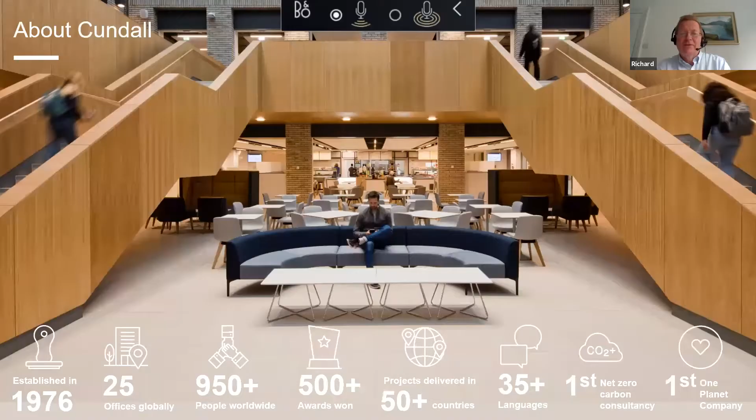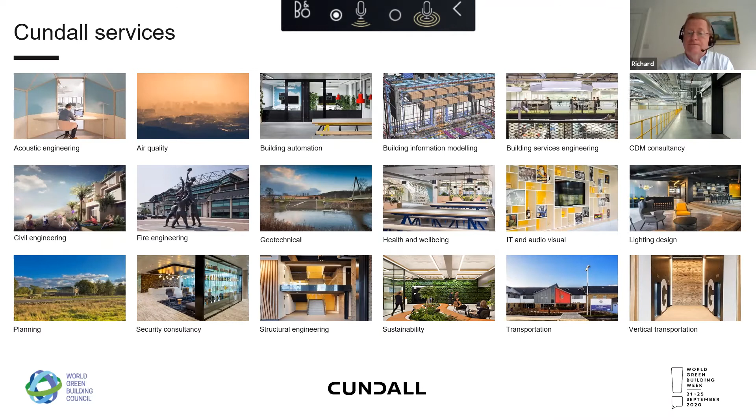We've got a very wide range of engineering services, so our core disciplines are building services, structures and civil. We've got a whole range of specialities around that to support those activities, between acoustics, fire, security. Sustainability is something that we drive through all aspects of the business, but we're quite specialised in that as well. And we work in all sectors: aviation, critical systems. Critical systems is a very key element for us, and it's very much an international offering, working for groups like Facebook, Microsoft, right around the world. Education is a particular strength of myself, and we do all the other main elements: retail, residential, etc. So straight into the presentation.

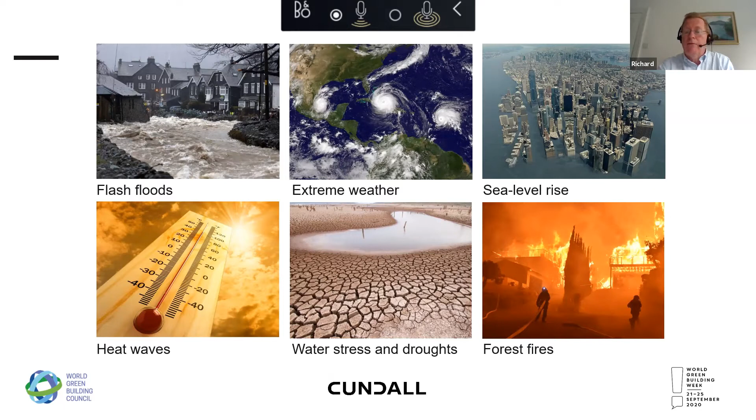The focus very much is about net zero carbon, and I've heard more about net zero carbon in the last 12 months than in the last 20 years. It's become a major consideration in many countries around the world, with countries recognizing there is a climate emergency. We've had extreme weather events in the last 5 to 10 years, between flash flooding and extreme temperatures. The contrast to flash flooding is water stress, so we've had droughts, and in the last 6 months we've seen wildfires in the US and Australia, with climate change recognized as one of the contributors.

We've also seen demonstrations right around the world, and these have been responded to by many organizations with a need to do something different. We have clients who have seen people demonstrating in their streets, and they've realized they haven't been doing enough. They've quickly been getting organized to put policies in place to start dealing with these issues. So there's a groundswell of concern among young people in particular.

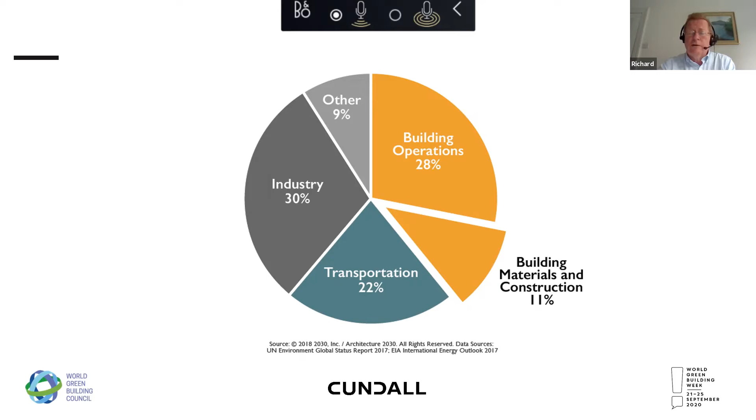When you look at where the source of carbon emissions comes from, the building stock is a major contributor. The actual operation of buildings contributes about 28% to carbon emissions. Building materials and construction is around 11%, so that's 39% of the total, which is quite substantial. Transportation, getting to and from buildings and homes, is a major contributor as well. So all these aspects have to be dissected and addressed.

In the UK particularly, we're seeing pressure from the top. The government has committed the UK to being zero carbon by 2050, and that commitment was made a year ago. It's legally binding, and public bodies are all looking at plans for how they would actually get to zero carbon. I'm currently working on what's called Gen Zero for the Department of Education, developing plans for zero carbon school prototypes, with the intention that all schools going forward will be designed to a zero carbon standard. This is going right through the country, and it's not just the UK.

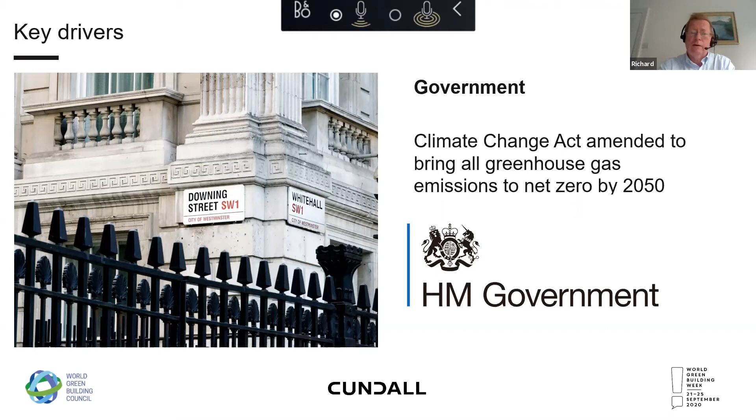There are many countries around the world now looking to adopt these as legally binding requirements. There's also quite a push from investors, who are looking for organizations that have taken a strong environmental stance to invest in. We work for various American funds looking at assets that are potentially able to be improved environmentally, but also provide social value, and they are buying assets right across Europe and the world.

Developers are committed to the World Green Building Council's net zero carbon commitments. We had a presentation last March with the Emirates Green Building Council specifically on this element. Right around the world, all the green building groups are taking up this challenge, and we would very much recommend that you support the Emirates Green Building Council in their efforts to achieve these commitments.

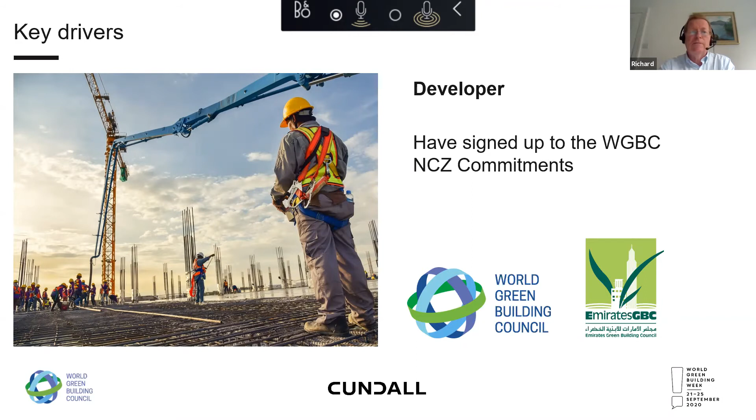And then there's occupiers as well. Companies are recognizing they need to do something specific, and they are adopting science-based targets, which would effectively deliver the Paris Agreement. It's looking at all the activities of a company, from flights and travel to what they consume within their buildings, and working out suitable targets to achieve the climate change targets of the Paris Agreement.

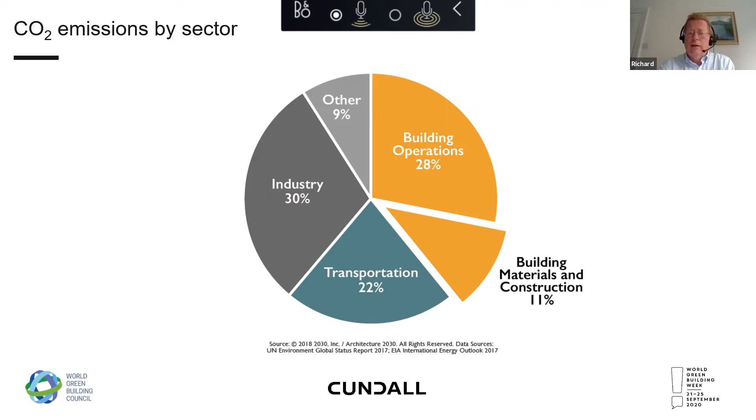So just focusing specifically on net zero carbon buildings: we've looked at this, and this shows the breakdown. As we said, it's almost 40% of the actual CO2 emissions associated with buildings themselves. So as an industry, we really do have to take on board carbon reduction strategies in order to achieve the world targets.

The World Green Building Council has set out various targets. For new buildings, by 2030, we need to achieve a net zero carbon in operation standard. For existing buildings, the target is 2050, recognizing that existing buildings are more difficult to deal with and need more time to get the retrofits in place. We'll discuss both these areas over the next few slides.

So when you look at a net zero carbon building, the first element is net zero carbon in construction. So it's looking at all the elements that go into constructing the building itself: structure, facades, etc. The other element is the operational energy, so the energy consumed by the building through heating, lighting, appliances, etc.

But when you look at whole life zero carbon, it has a range of other things which aren't specifically included in that definition. So it's maintenance, demolition, and reuse at the end of the life of the building. These are quite difficult to deal with at this point in time, simply because we don't know specifically how the building will be recycled at the end of its life. And the best strategy for some of these things is for the building to be designed for recycling, so that you recover that asset and the financial value of it at the end.

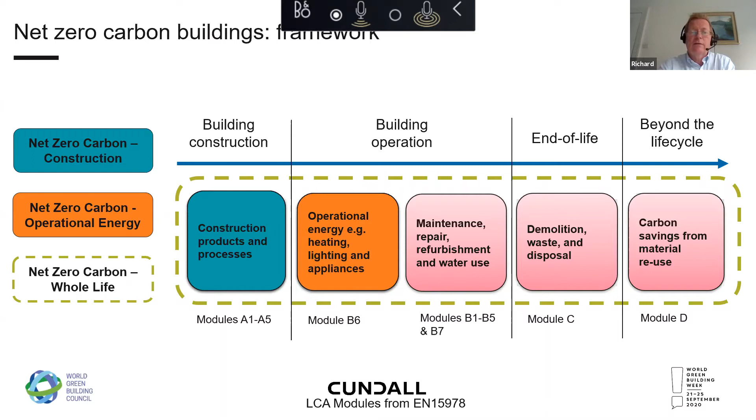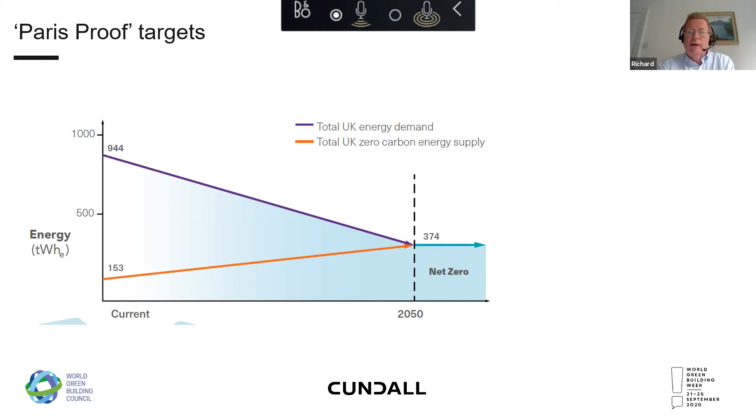The fundamental principle is that we need to reduce the energy intensity of buildings and increase the amount of renewable energy being generated. The two will meet each other at a point, hopefully before 2050, if all goes well. And at that point, we are producing sufficient renewable energy to satisfy the energy intensity of future buildings. Now, this is a set of targets.

It's UK specific, but it shows the kind of principles of what is trying to be achieved. So currently in the UK, you could say that the energy intensity would be anywhere between 200 and 160. In the Middle East, due to the higher cooling demands, I would expect the energy to be around 200, 250. But the point being, we're trying to get from 160 down to 70, which is a very, very significant challenge. That's for the whole building.

You look at the very bottom line, it's suggesting what the energy intensity for tenants are, and that'll be similar right around the world. So currently, on average, we're probably around 70 kilowatt hours per meter squared, and we need to halve that. So what does that mean for businesses working in businesses?

They need to think about the servers that they have, which consume a lot of energy and require cooling. So by transporting those to cloud services, you take that energy out of the building and the cooling requirements, and that makes a significant difference. But it's also how people manage themselves in buildings, making sure lights are turned off, and that equipment is shut off at the end of the day. All are really important. Getting to these targets is going to be very difficult. It will require a lot of effort from a lot of people.

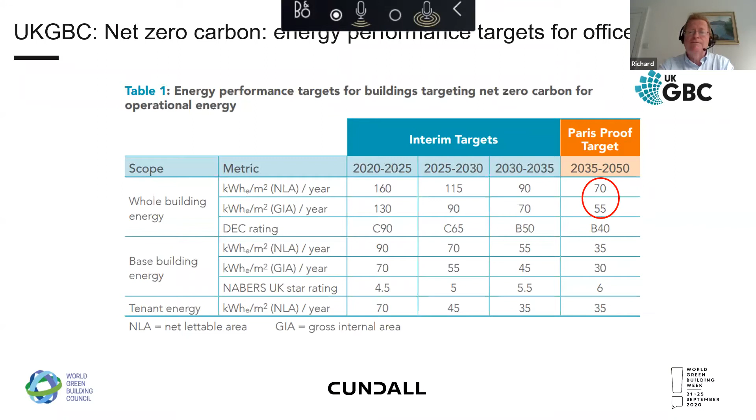The RIBA have similar targets, and you can see for 2030, they're suggesting a range of between 0 and 55. Well, 0 clearly is not possible, otherwise buildings are no longer of any use to anybody at all, but certainly 55 is the demanding target.

There's also targets for embodied energy, the suggestion being that we're about 1,100 now, and we need to get down to 500. 500 currently is hugely challenging. That would be a timber construction, and that involves technical difficulty and cost.

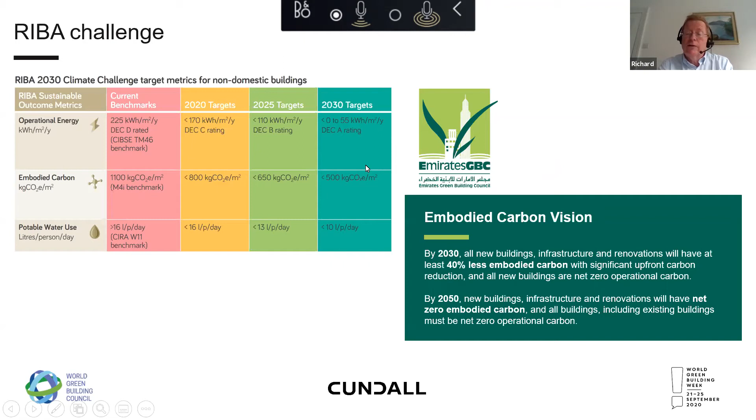And these principles of embodied carbon are certainly being adopted locally. So the suggestion is that there's going to be 40% less embodied carbon in the Emirates by 2030, and zero embodied carbon by 2050. So it's a similar type of trajectory that's been suggested right around the world, and it's the same challenge in every region.

So just looking at our framework for zero carbon, we've looked at what are the various steps that one needs to take to get to zero carbon. The first aspect being passive design, so get the basics right within the design itself, reducing operational energy demand and consumption, eliminate or minimize fossil fuels in buildings, looking at renewable generation on site and storage where possible, and there's obviously limitations with that, limiting the upfront embodied carbon, which I'll talk a little bit more about.

Consider whole life carbon in conjunction with whole life costing. So cost is a resource for a project. It needs to be considered in conjunction with carbon so that you get the maximum carbon benefit. And then transparency, so public disclosure of the actual performance of a building, so you can demonstrate to other organizations that it is possible, and encourage them to do the same thing. But the word optimization is a tricky word in the sense that we always talk about optimization of buildings, building facades and so on.

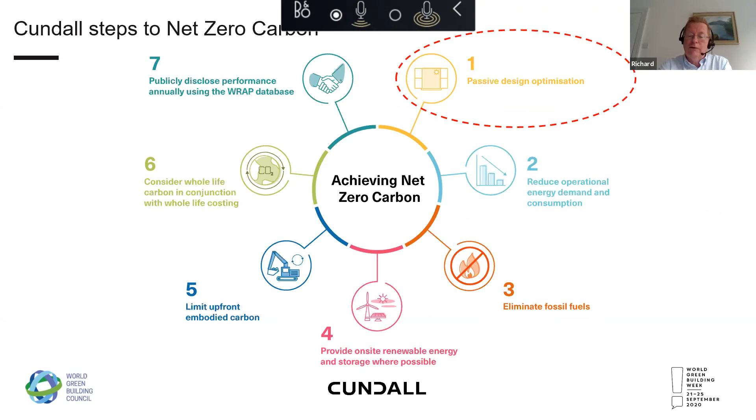So how often can you optimize and actually achieve something different? That needs to be looked at much more carefully.

When you think of the first step, passive building design, where do you start? One of the key elements is the envelope itself, asking what's the maximum amount of glass you need on the facade to get daylighting in. The glazing is a source of solar gain, and a source of heat or loss of heat depending where you are in the world. Either way, it's a weak spot for the building.

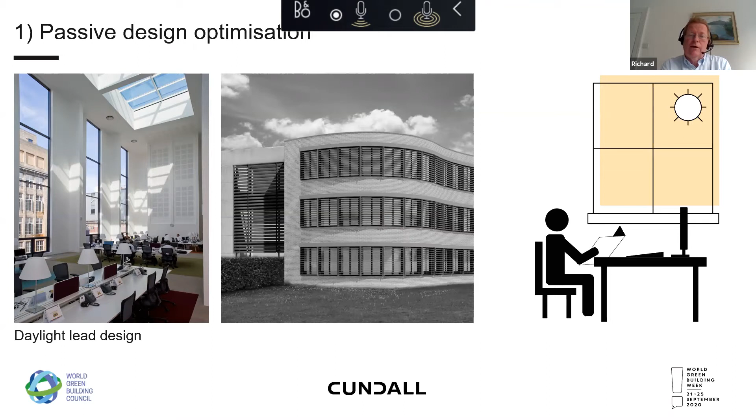So you shouldn't have any more glass on your building than you absolutely need for daylighting. The way to work that out would be to look at metrics such as useful daylight illuminance, which looks to get only as much glass on the facade that provides useful daylight. That way you can minimize the glass on the facades without compromising the daylighting of the space.

The next step is looking at the envelope, having the right levels of insulation to keep the heat out, and designing out thermal bridges, which are weak points in the envelope that allow heat to move into the building itself.

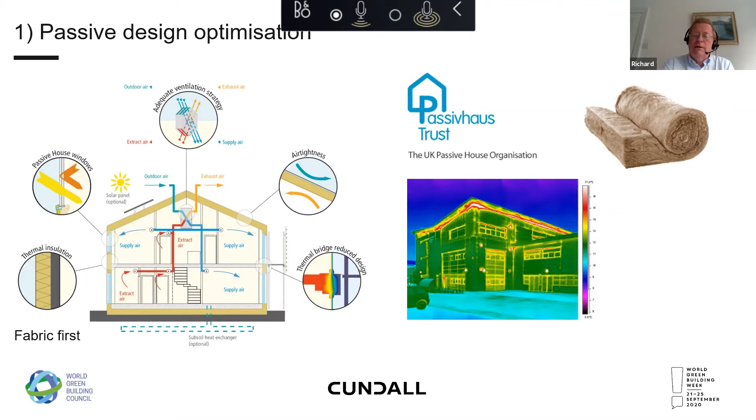Natural ventilation is definitely an option right around the world. Even in the Middle East, there's times of the year, three months or so, where natural ventilation would be very effective. We have integrated natural ventilation into a number of projects, including the American University, and that's proved to have relatively low energy consumption. It's down as low as 150 kilowatt hours per meter squared, which is pretty good for the Middle East in particular.

It effectively allows energy reduction for about 20% of the year, so it should not be ignored.

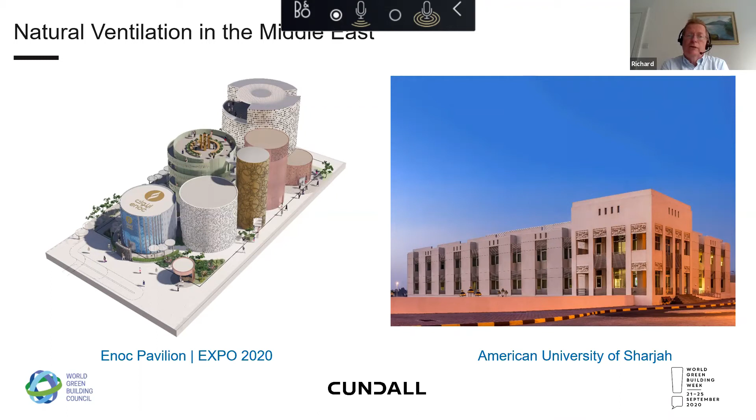The other aspect of facades is the infiltration levels, and air leakage testing is a really good way of seeing whether the facades are achieving the standard that's required. Not achieving the standards means you're going to have problems with condensation within the building, and with that you've got mold growth on ceramics, ceilings, etc., which is also bad for people's health.

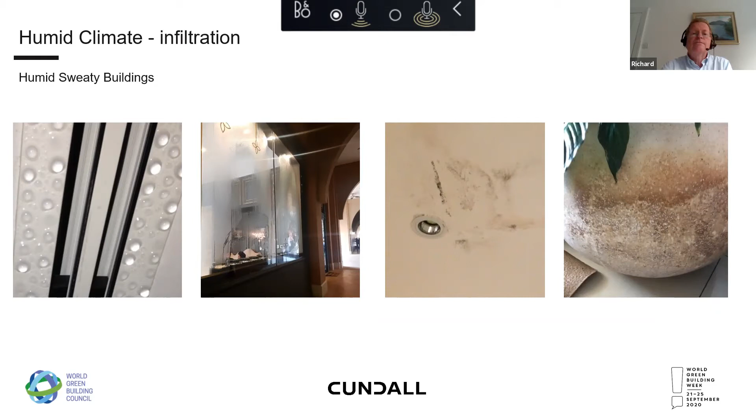Reducing operational energy demand and consumption is one of the next steps. There's a whole range of building optimization and systems optimization that can be looked at. But in doing so, we need to make sure that we're looking at energy carefully from the very early stages of the design.

One methodology for doing that in the UK is called Design for Performance. It's coming from an Australian system called NABERS. The idea is that you are looking at proper energy models that accurately reflect the building performance and the actual makeup of the systems themselves.

So you're building plant models which have all the control strategies built into it, so you can effectively test drive the building at the design stage to see how the selected systems are performing against the variable loads within the building. This means you can then establish what targets are there for the building, and they can be included in contracts so that contractors are legally obliged to deliver those standards.

It's a way of actually testing whether the commissioning has been done properly and whether the building has been constructed properly. In the first year, you can compare the actual energy consumption with the predicted energy from the simulation tool. That highlights which systems haven't been commissioned properly or aren't working effectively, and allows an optimization process to occur. In Australia, this has reduced landlord energy consumption by about 70% in offices over the last 20 years. So it's a system that is demonstrably effective.

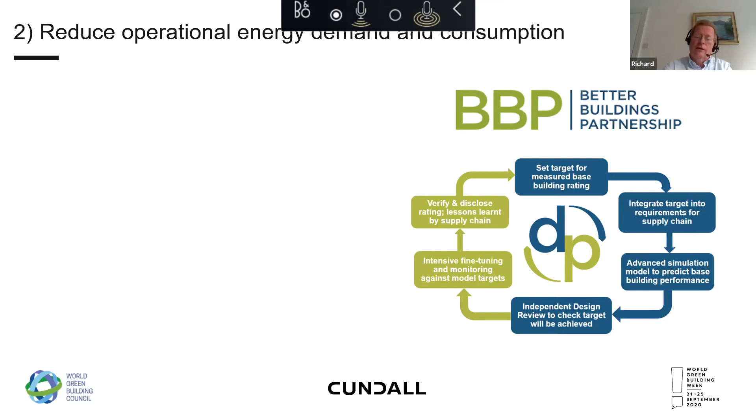Minimizing fossil fuels is important, and again, there are a number of areas within the Middle East where cooling and heating is still an issue. If we can get heating systems onto electric supplies using heat pumps, then as grids decarbonise, by default the heating impact is dropping down.

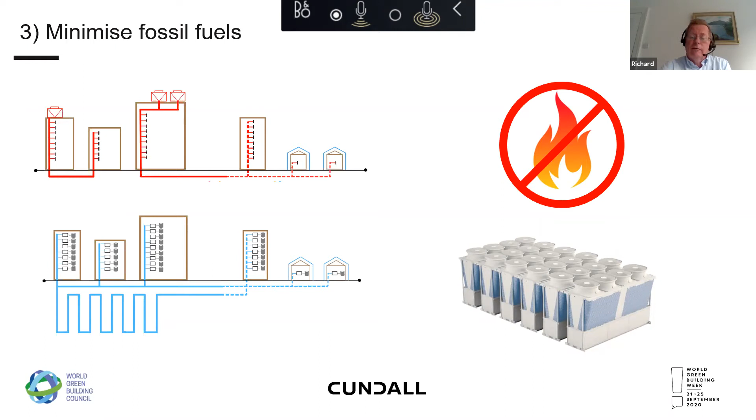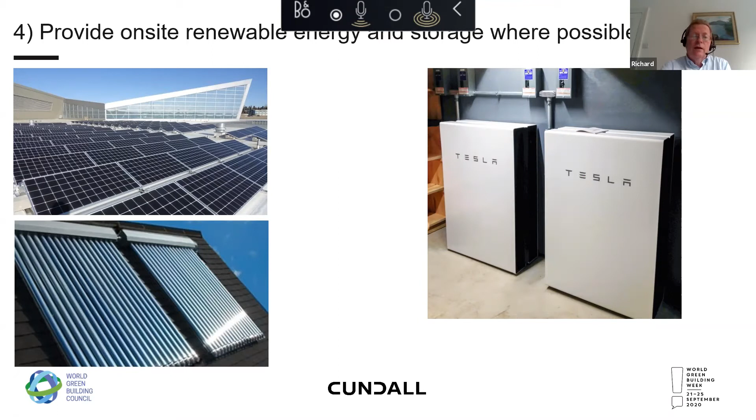Using solar thermal, which is increasing in the Middle East, means we're just using the energy from the sun to generate hot water for residential and other buildings. Photovoltaics are another methodology, and particularly with batteries, then we can match the generation with the demand.

This is a development in Dubai looking to significantly reduce the carbon emissions of Dubai. So far the photovoltaic element has been installed, but there are plans for a concentrated solar installation, which generates energy by concentrating solar onto the tops of these towers, producing steam that allows them to function through the night, providing reliable and continuous electrical generation for the city. This is part of Dubai's plans to become the lowest carbon city in the world by 2050.

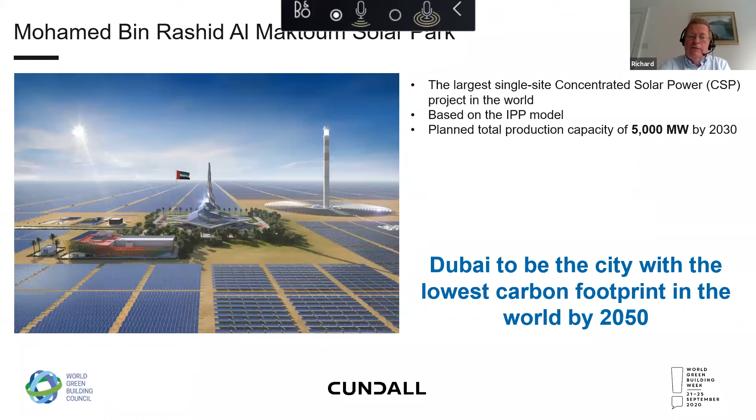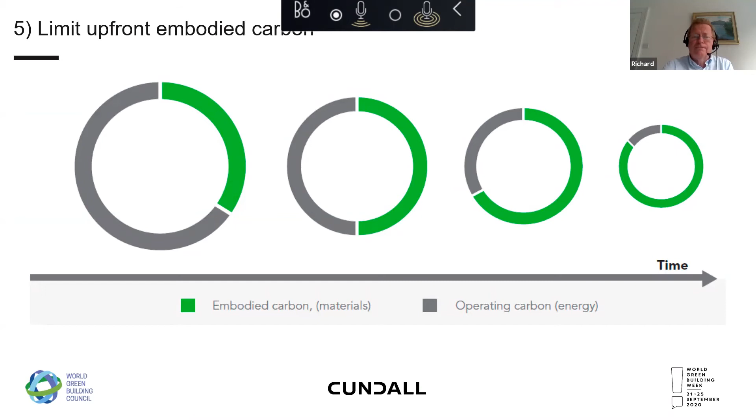We've talked quite a bit about the operational side of things, but as operational energy drops, embodied carbon going forward becomes the main source of carbon emissions from a building. As a result, we need to focus on embodied carbon, which looks at the energy associated with construction materials, from extraction from the ground through manufacturing, transportation to site, construction, and then through to demolition and operation.

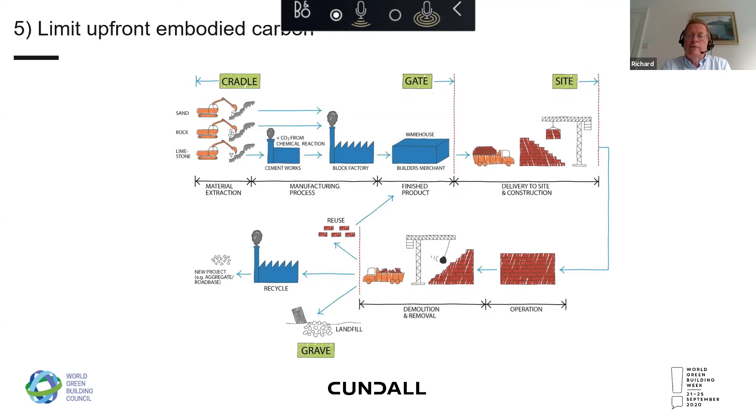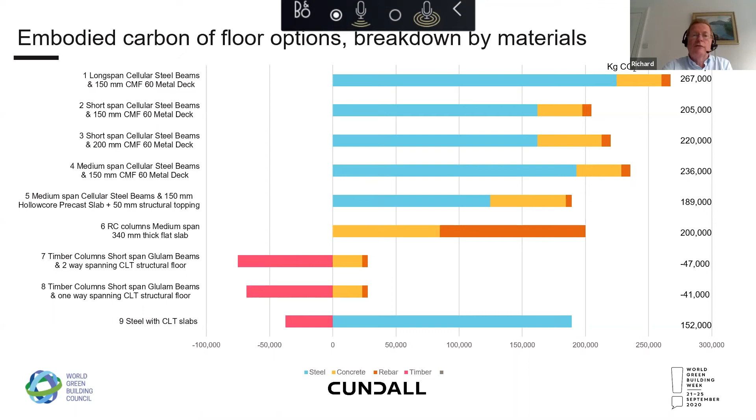This is a breakdown of the various materials in a building. In blue, steel makes a very significant contribution. Concrete is also a strong contributor in terms of CO2. When you look at timber, shown in pink, you can see the dramatic shift it has in relation to the overall embodied carbon of the building. So timber is certainly an option that needs to be considered, to see what contribution it can make to reducing embodied energy in buildings.

There are methodologies for looking at the embodied energy of buildings, and RICS have set out whole life cycle assessments that can guide people through it. There are various tools, and we created the CIC tool for the Hong Kong government, which is available. But as I said earlier, considering whole life carbon in conjunction with whole life costing is really important.

We're working on a project at the moment where the client likes the idea of a CLT solution, which has benefits in terms of low embodied carbon, but also a biophilic element — people really like the connection with natural materials, and it looks fantastic. Concrete is the alternative, and it provides passive cooling, which is good, and it's great from an acoustics perspective, etc. So there are lots of good reasons for using concrete.

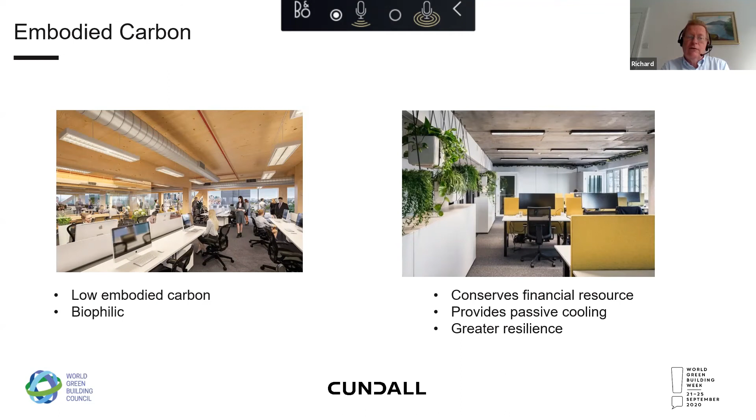But just looking purely in terms of carbon emissions, one question I've asked is: while CLT is certainly a lower embodied material than concrete, it also costs about 30% more. So the question I posed was, if you took that 30% cost difference and invested it in something else in the building or outside the building, would you get a greater carbon reduction for your dollar compared to the timber? You need to look at the financial resource in the project and see whether where you're investing it is giving you the best carbon reduction for your investment.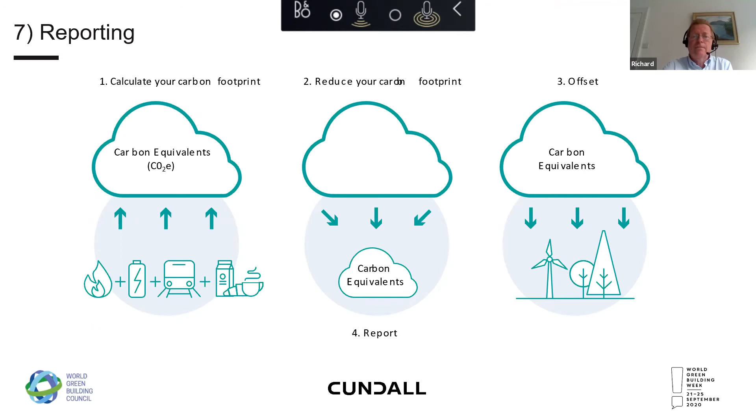Reporting is very much about transparency, making sure that people are doing the right thing, and it's part of an overall strategy for any organization. First, you calculate your overall carbon footprint, try to reduce it to the minimum, and then where possible, offset that. All of this needs to be a very transparent process so everyone understands where the carbon reduction is occurring. Offsetting is something we need to be very careful about.

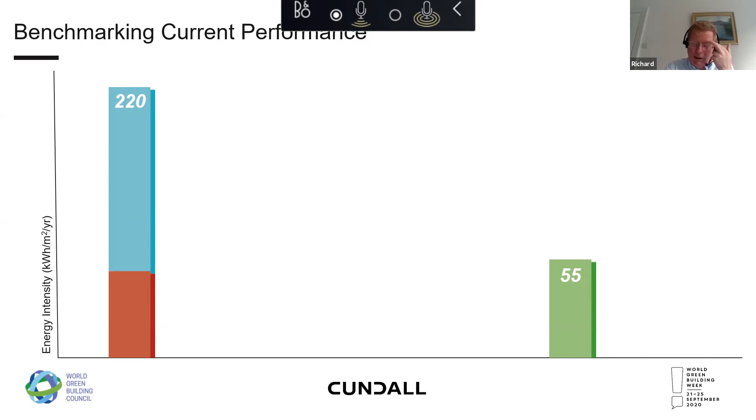And then if the envelope isn't significantly insulated and well sealed, then the amount of electrical energy you need is significant. So getting the fabric sorted out is also a very important element.

Introducing natural ventilation, as I said earlier, is a great way of reducing annual energy consumption. But that requires window replacement, access to facades, etc., and it can be very disruptive to tenants. HVAC plant optimization can be done centrally, so that's less of an impact on tenants.

And then finally, behavioural change of the occupants themselves should be considered. One way of thinking about it is that if we didn't cool buildings to as low a temperature as we do, and we allowed temperatures to rise, then the energy consumption significantly drops.

What we don't want to do is provide uncomfortable environments for people. So if we are upgrading facades, we can look at less glass while still maintaining views and good levels of daylighting, which potentially means you could have higher temperatures in spaces without significantly causing discomfort.

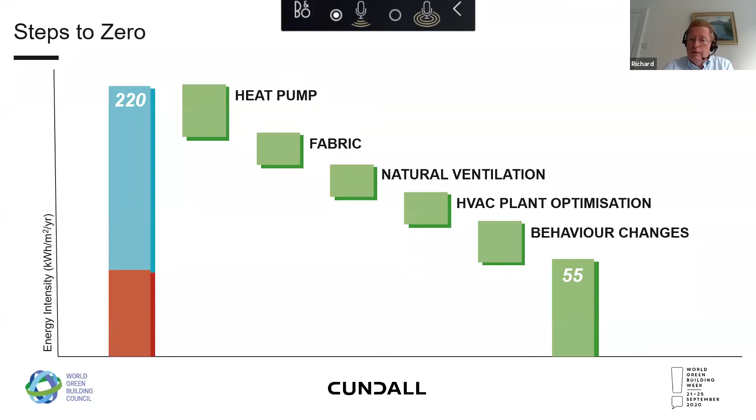So you could have an overall strategy for how you would allow buildings to operate at a lower level through occupant behaviour and biophilic responses, without compromising productivity within the building itself.

And all this needs to be planned out. As I said, you have occupants in buildings, you cannot disrupt them too much. So you need to look at central plant replacement and then work out what is the zero carbon roadmap for that building.

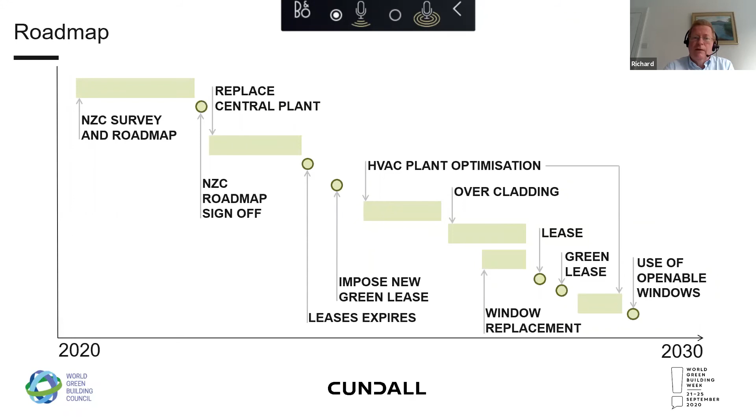It needs to be timed in when leases expire, and that allows green leases to be put in place too, so you can get tenants to think about how they're actually going to behave within the buildings and come to an agreement as to what would be the operational profile, so that systems can be set up to respond to that. At some point, overcladding becomes a possibility, so then you can get green leases in place, etc. All these steps need to be planned into the overall development.

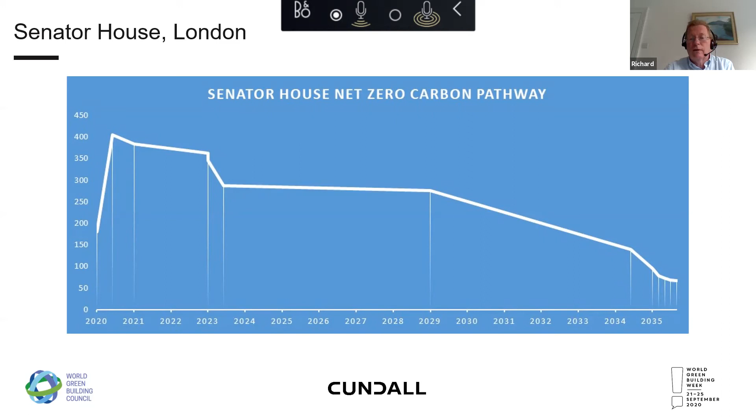You can see from this graph what's being planned on this particular building that we're looking at in London. And there's no silver bullet - it's a question of incremental improvements so that you eventually get to that zero carbon target.